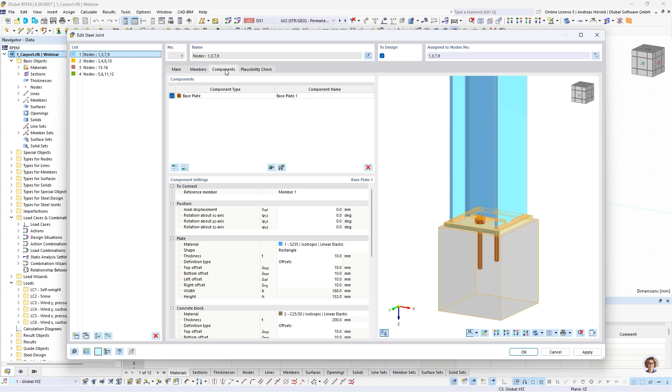I'll start with the carport model I presented in the last webinar. Let's turn to RFEM. This is the model from the latest steel joints webinar—a carport made of steel. We created different joints: a base plate for the columns, rigid connections for the frames in both directions, and joints for the inner and outer purlins.

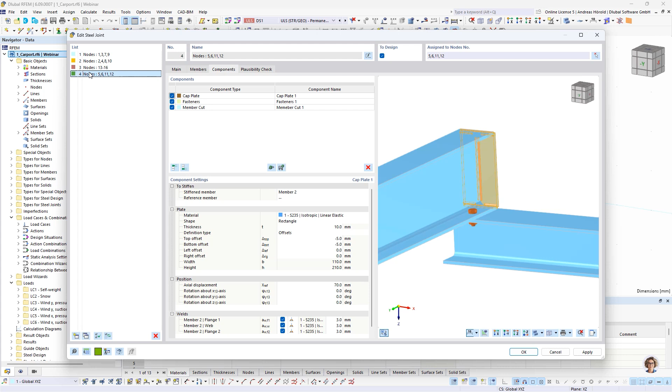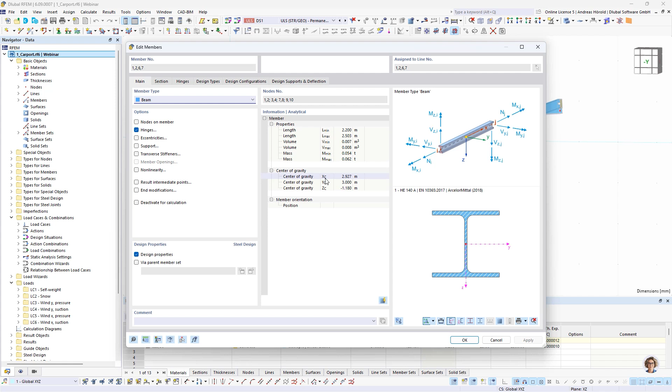To show the feature with circular bolts, I'll change the cross section of the columns. Members, edit. We change the section to a circular hollow section, this one.

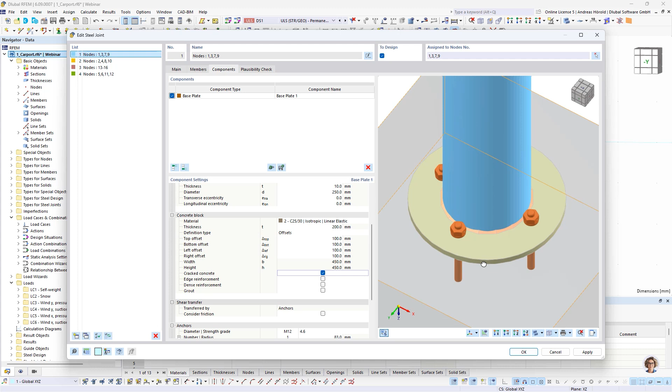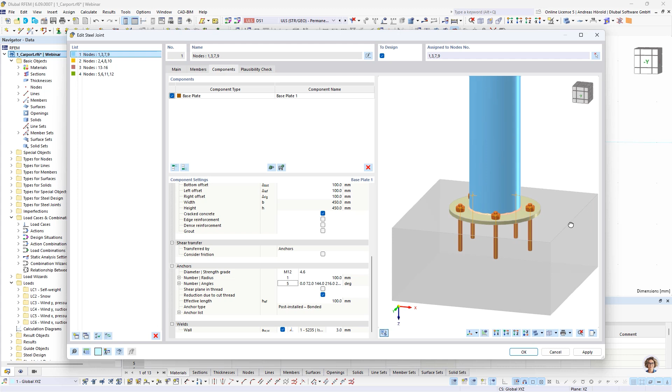Now let's change the base plate. First, we change the shape of the plate to circle and set the diameter to 250 millimeters. Then we make the concrete block larger. We use 5 bolts, and the radius should be 100. That's all for the first feature.

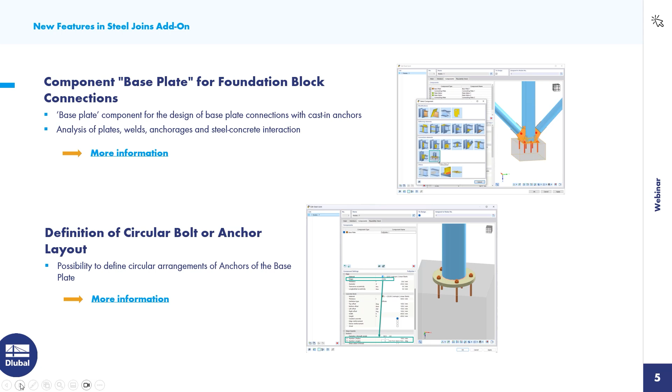Let's turn back to the PowerPoint. I defined the layout for the anchors, and the same workflow applies for bolts. Next new feature: component rib. You can define any number of longitudinal ribs on a member plate with the rib component, and this is also possible for circular hollow sections.

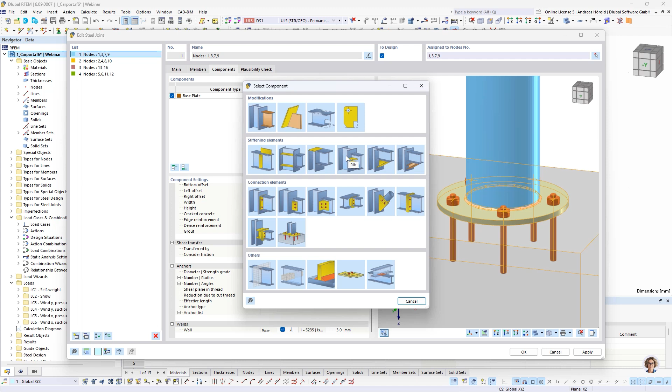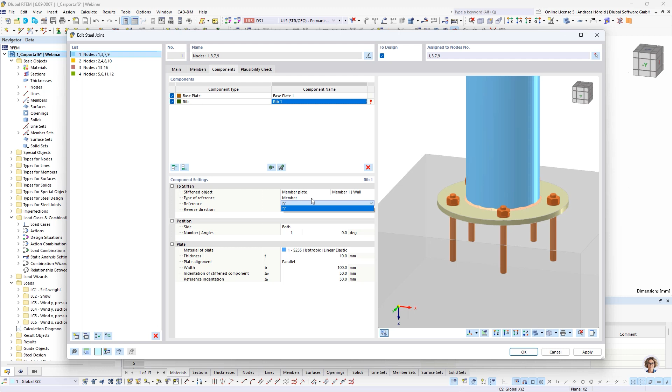Let's turn back to RFEM. We have a circular hollow section, and let's define ribs here. New component—in the middle, second line, you can find the rib component. Member plate is correct, and member 1 and wall is the stiffened object. The type of reference should be the base plate—base plate 1, plate. Okay, you can see the rib.

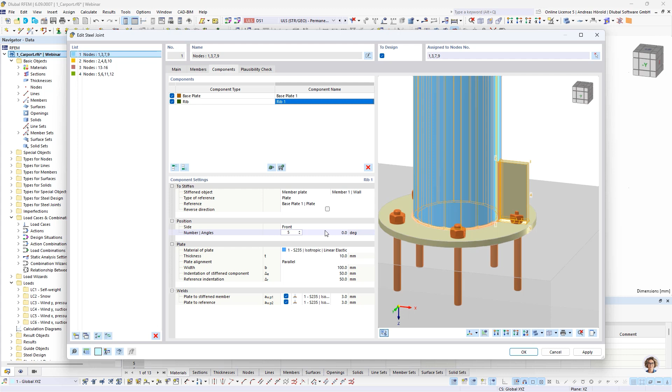Not on both sides, but on the front side. Number of angles is 5, the same number as for the anchors.

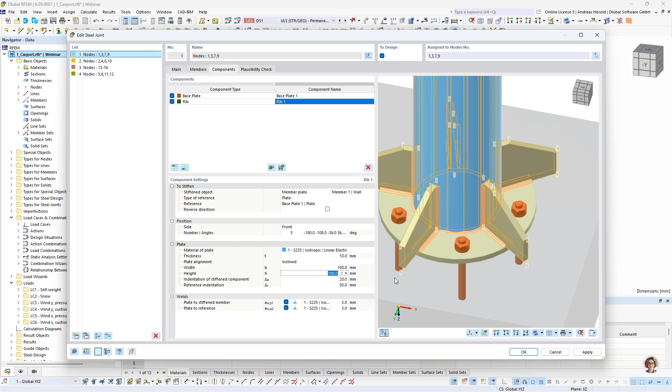Let's modify it a little bit. That's too small, not parallel—we use inclined instead. Then we modify the ribs a bit: 20 is okay, and 30. That looks quite good. Let's turn to another example for the component rib—you can also see a rib here.

This is the component, and here you can find the rib. Let's modify that. We create 2 ribs with another distance, -50, 100, on both sides. Yeah, a quite useful component, and it's quite new in our program.

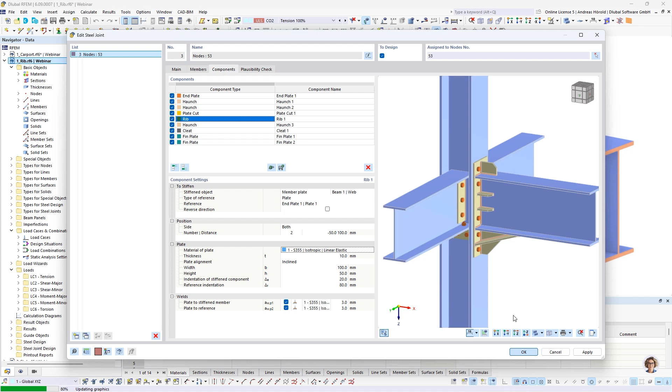So then let's turn back to the PowerPoint slide. Limit plastic strain for welds. You can modify that value for more security or something like that. The standard setting is...

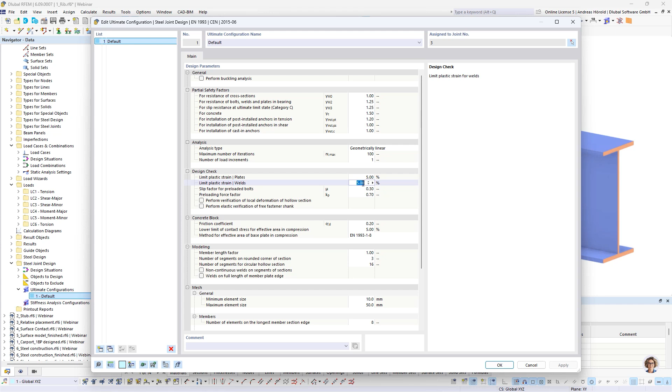5. Let's turn back to RFEM. I can show where you can change that. You need to select in the navigator data and steel joint design, the ultimate configurations. So you can then see here the limit plastic strain for plates and for welds. And as I said, 5% is the default value, but you can change that if you want.

So let's turn back to the slide. Next slide, and next new feature, the component stub.

It enables extension of a member via plate joint with another member. If you add such a component, it's not considered for the stiffness of the global model, but for the connection. So let's turn back to RFEM.

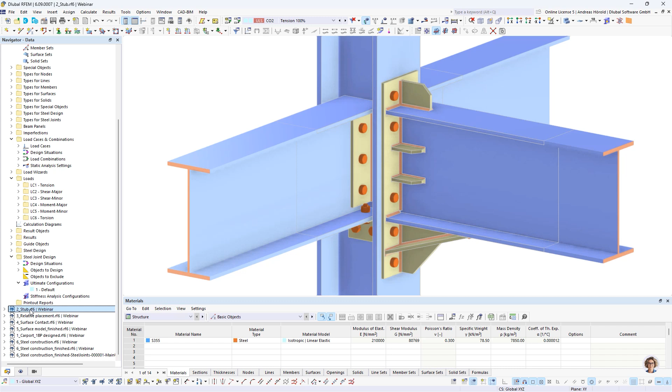The next prepared model. So you can see that node, and imagine you want to connect this horizontal member to the column with a rigid connection, but you have no space for the bolts here because of this joint.

So, and therefore, we can add a stub. Double click on the joint and add a new component. You insert component at the end. So, and you can find the stub here in the third line, and you can see the stub.

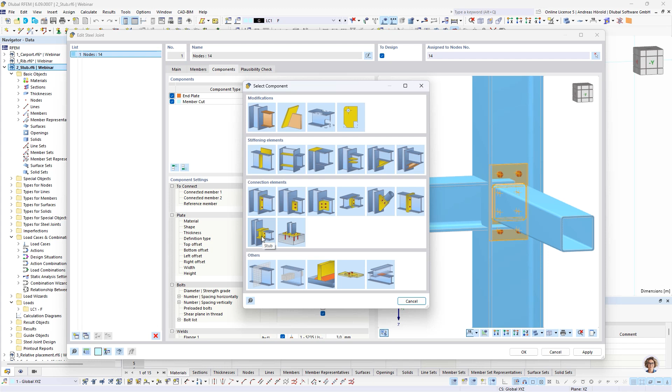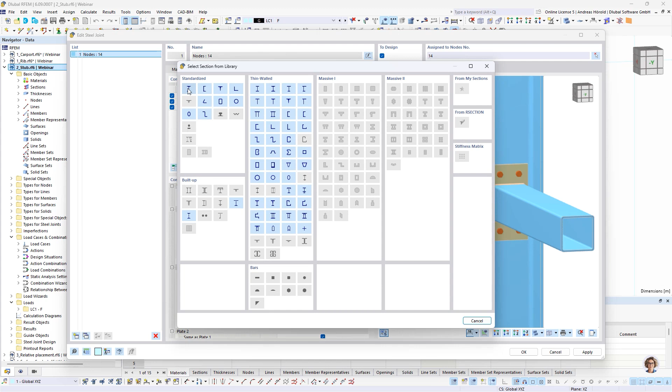Okay, so then we have to define the connected member, member 2. Then reference member is this one, the column. So then we have to define a section. We use the same section as for the horizontal beam, standardized, then HEA 200.

So now we leave the length 300 millimeters. Then we define a larger thickness. Now let's change the values to increase the plate a little bit.

Let's modify the bolts. And 16, 10.9. So, and then 75, 90.

Yeah, that's the component stub. And you can use it for this, for such connections, or also for other connections.

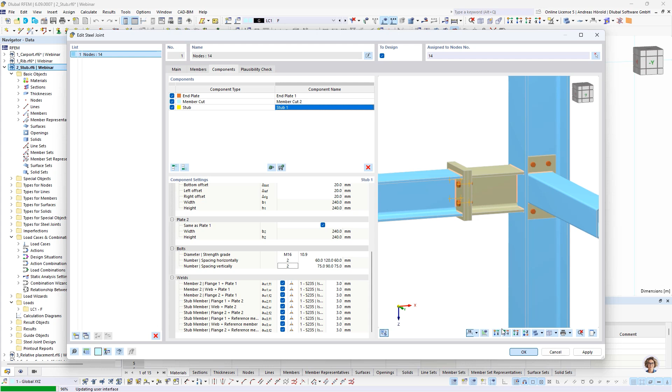So then let's turn back to the PowerPoint slides. Next new feature, the relative placement of objects. You can arrange objects with a relative reference to other objects.

I would like to show that also in RFEM 6. I've prepared another model, this one. Okay, let's double click on the joint components.

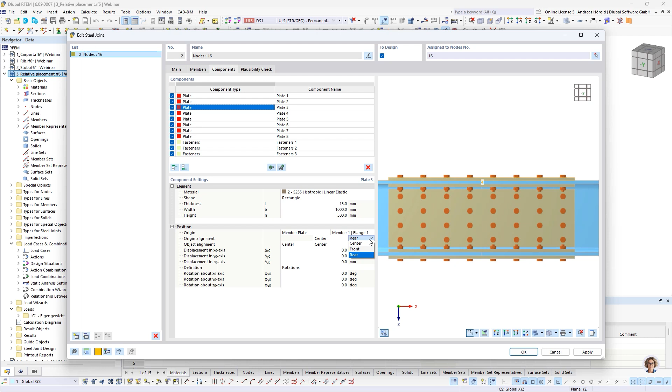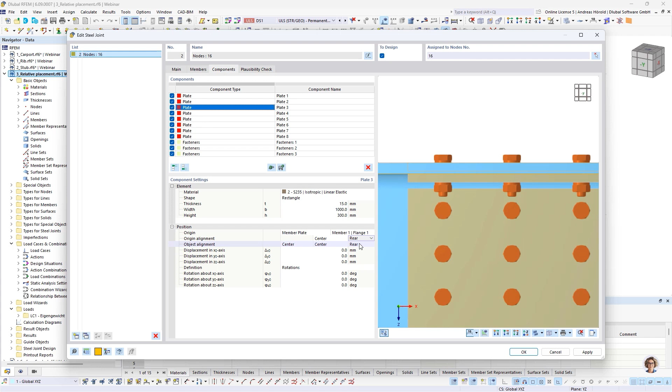And I would like to show that on the upper plate, on this plate. So, and you can see the alignment here. The origin alignment, it's the definition of the origin. And if you say, okay, that's not the rear, but the front, then there's another reference. And the object alignment, when I say not front, but rear, then the plate is below the flange. Okay, I hope you understood what I did. I move it back to the upper side.

Or let's show that on another example. I decrease the plate a little bit. Ignore the bolts. So, and if you want to define the plate not on the center for both, you can, for example, define the left side for both, and you can see now they are at the same edge here.

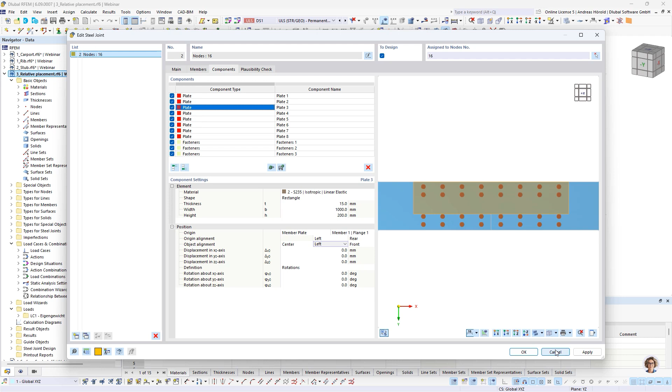Okay, that's all to that component. Turn back to the PowerPoint slide.

Next new feature, connection library is now in the Dlubal center. You can define your own user-defined connections there and so on. I will show that feature later when I search for a prepared connection in that library in the last example.

Then plate component with polygonal geometry shape. You can create such plates here with a polygonal shape. That's possible now.

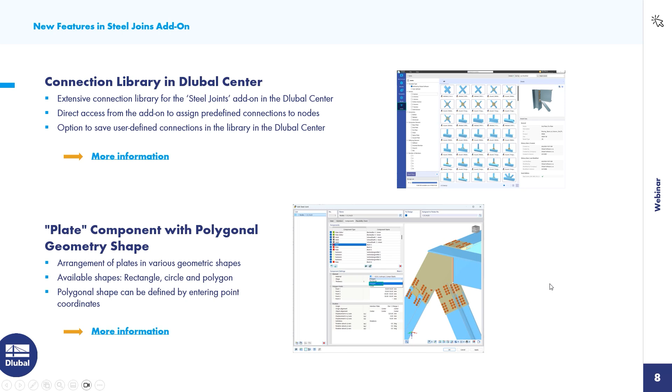So then the new component surface contact. You can also consider friction between two members or plates, for example. I would like to show that in RFEM 6 as well.

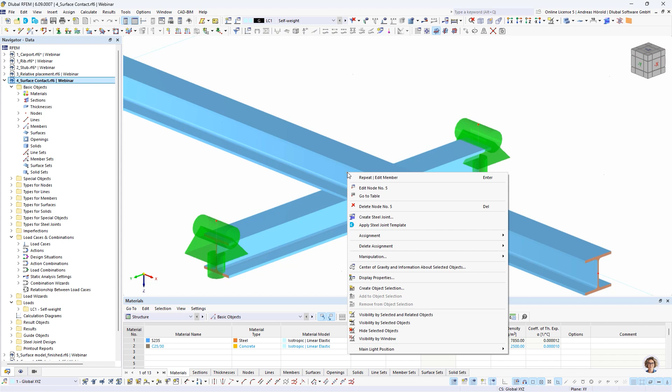So I prepared that example. You can see this member has an eccentricity, and the top of this member is equal to the bottom of this member. So, and let's create a steel joint.

So those are the four members. They are not ended but continuous.

Then components, new component. That's the component in the last line on the right side, contact.

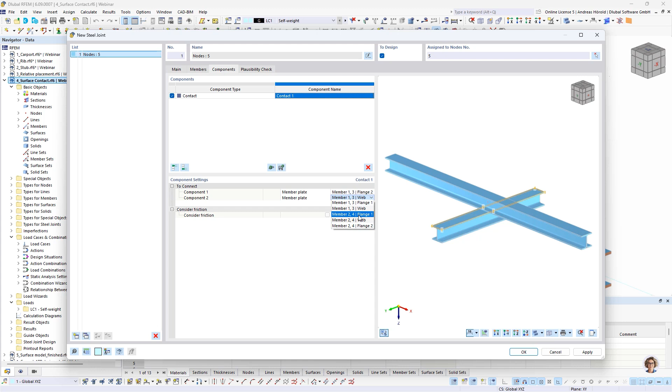So then let's select the components, member plate, member 1 and 3 and flange 2, the lower flange. And for this member 2 and 4, the upper flange. Okay, so, and you can also, as I said, consider a friction coefficient.

Okay, that should be all to this feature.

The next feature is the steel joint design on result beam member type and surface models. You can define result beams or surface models and consider that for your steel joint.

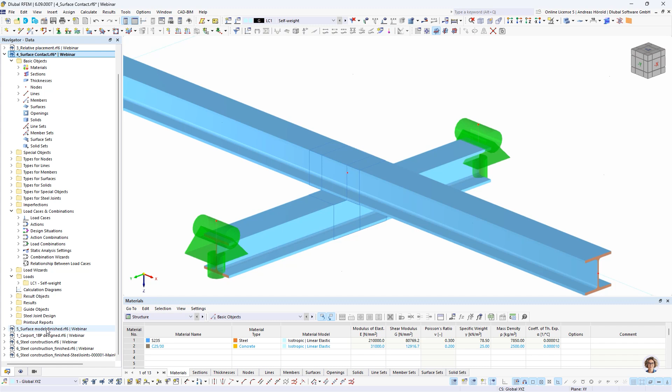For example, when you create openings, you can use a surface model. Let's take a look at it in the next example. In this example, there's a surface model with openings. How to create such things: that's a surface model, and for the member I created a surface model. I double click on it.

So member type is surface model. Then you have to select a section. And for example, you can then define member openings, reductions. A circular opening at that distance, two openings with that offset and that diameter. Okay, those are the openings. And that's the assigned line 22, this line.

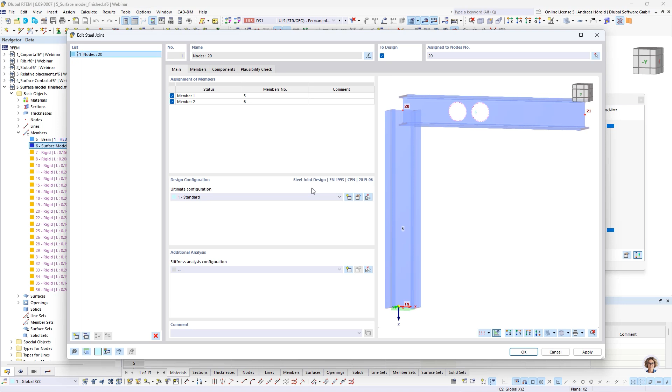So, and then you can create a joint for such a node with these components. Quite easy. Okay, that's all for that new feature.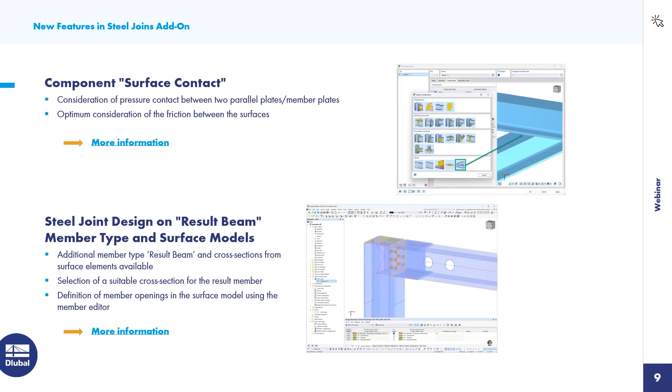The next feature is the transfer of foundation dimensions in the base plate design. At first you have to define concrete foundations in the add-on, and then you can adopt the foundation dimensions and materials in the base plate component.

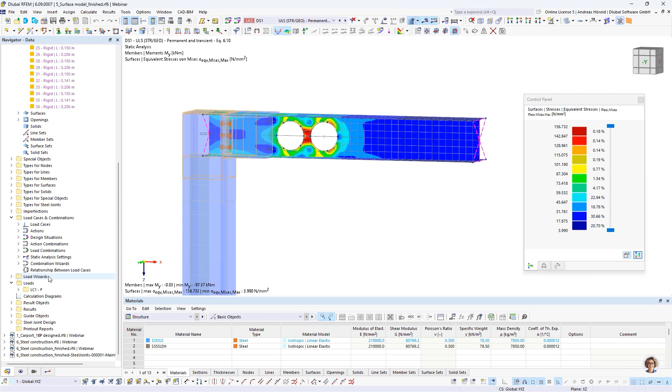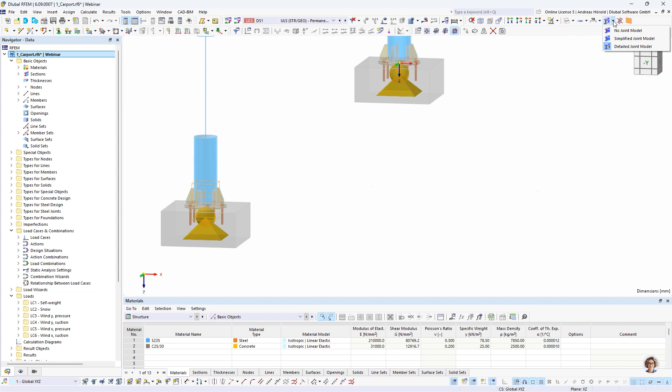I would like to show that also in RFEM 6. So that's the prepared model, the carport. We turn back in the carport. So, and we define now foundations. I have to go to the base data, then switch or check the concrete foundations add-on. Okay. So, and I define foundations now. Let me turn to the wireframe model and switch off the joints.

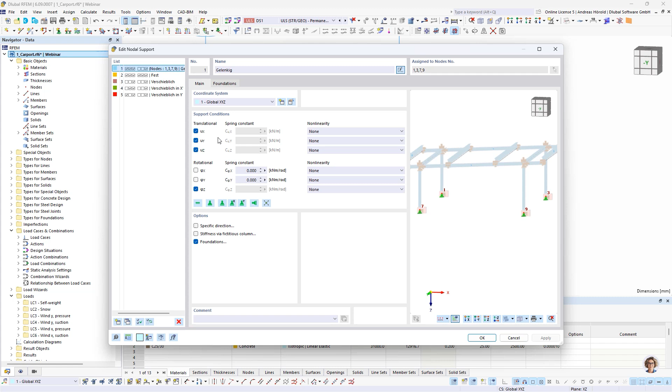So, and I have to edit the nodes. So, and I have to go to the support, then edit the support. So, and I check foundations. And I create a foundation, a single foundation, new. A foundation plate without reinforcement, a simple component or foundation.

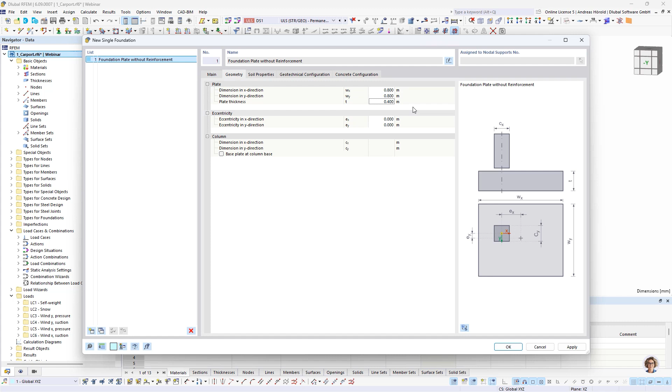Geometry: 0.8. I created it a little bit larger so we can see the difference to the block that we created at the moment. So that's all. Soil properties: I have to create a soil layer, sand for example. Okay. So, okay, that's all.

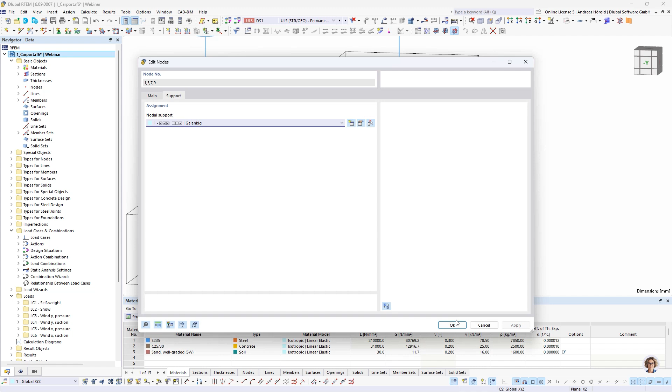Now, we have foundations below the columns. So, and now we switch to the detailed model. So, and I double click on that steel joint. So, and then I turn to the components, base plate. So, and now you can check this geometry from concrete foundations, and you will see the difference when I set the check.

Okay, now it's a little bit larger. Yeah, and as I said, it adopts also the material, not only the dimensions. Okay, so...

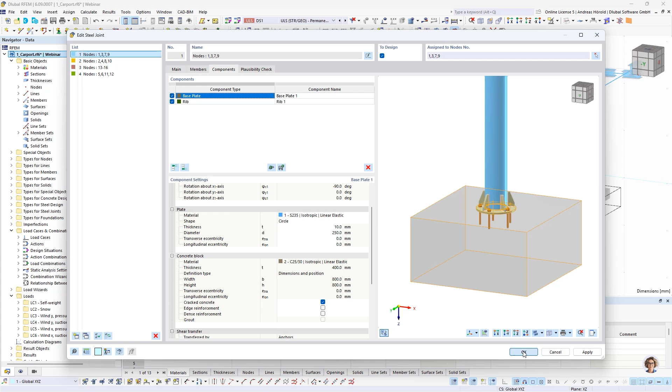Then we turn back to the PowerPoint slide and to the next new feature. The contact stresses can now be displayed graphically. I would like to show that also in RFEM.

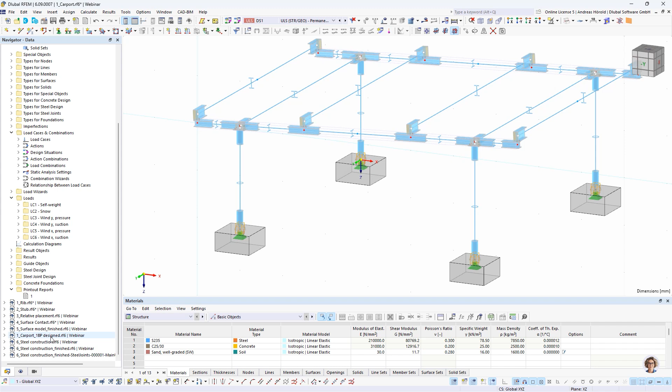So I prepared that model. It's the same carport, and one base plate is designed. So then I turn to the steel joint design table, and I double click on that line. So, those are the design check details. Yeah, and most of you know that, but the design checks are printable.

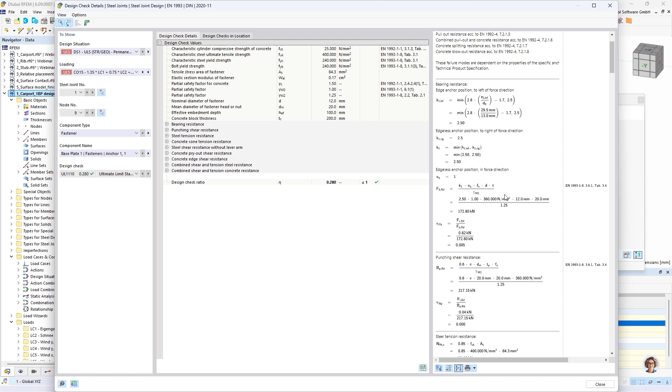For example, this design check, that's not a black box. You can print it to the printout report or directly to the printer. That's the equation from the standard. Yeah, as I said, no black box. You can calculate it by hand if you want and check that.

So, and when I turn left above to the results in steel joints, and then to the result in steel joints, I can set this check contact stress. And you can see the different contact stresses here. Okay, that's all for that feature.

Let's turn back to the PowerPoint slides.

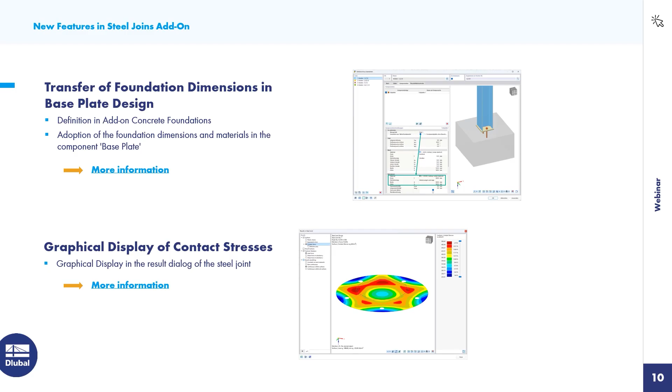And we turn to the last feature for today, and I will show that on an example. The joint structure interaction: that's the automatic consideration of the stiffness of the steel joint. It generates hinges in the global model, and you can consider the hinges in the subsequent calculations. I will show that also in RFEM 6.

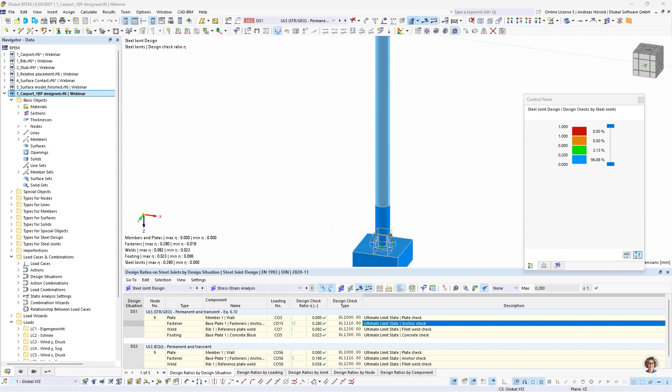So that's the prepared example: a steel construction, one floor. I created load transfer surfaces to apply a wind load for that area, on the top of the floor and the area below the floor. So then let's show the different loads: self-weight, then the imposed load.

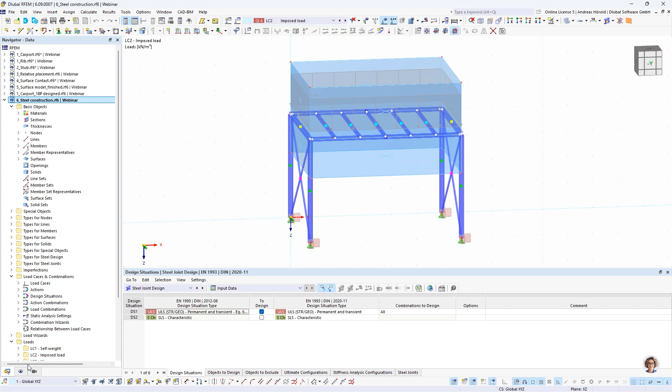Let's switch off the surfaces for a better overview. So surfaces off. That's the imposed load, and the different wind loads.

Then the ultimate limit state design, serviceability limit state design. And I did a steel joint design.

You can see the results, for example design ratios by section. Those are the columns, those are the horizontal beams. Okay, all is good, but we have a...

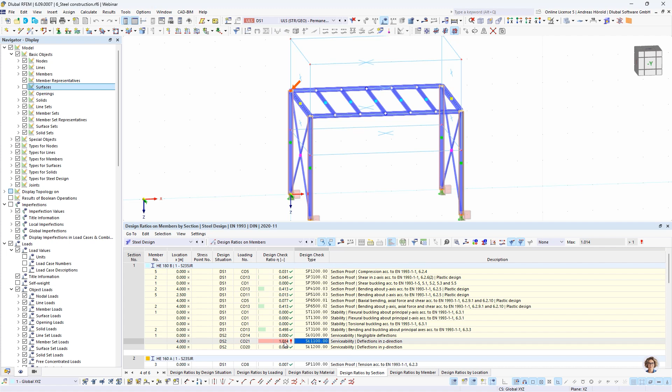design ratio for the serviceability limit state design of the columns in the horizontal direction. It's slightly overloaded, but I think it's okay. Yeah, but the question is, what happens when we create a steel joint? And that's what we check now.

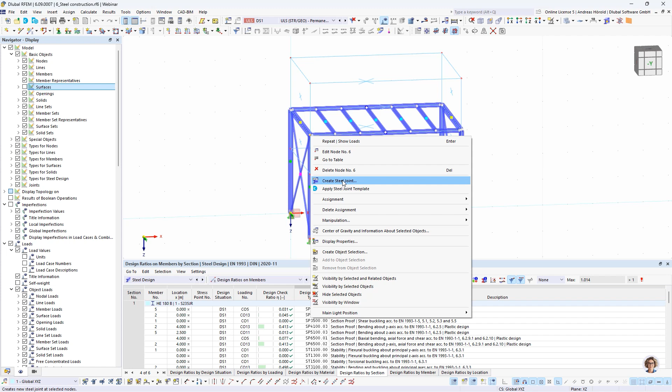So we create a steel joint, for example for this node. Create steel joint. I rename it from member to column, and this member I call only beam. So we don't use that member and that member.

So that's the ultimate configuration. It's okay. And that's now the new feature, stiffness analysis and stiffness analysis configuration, where there are different possibilities: the initial stiffness, no interaction, and this is the new feature, joint structure interaction.

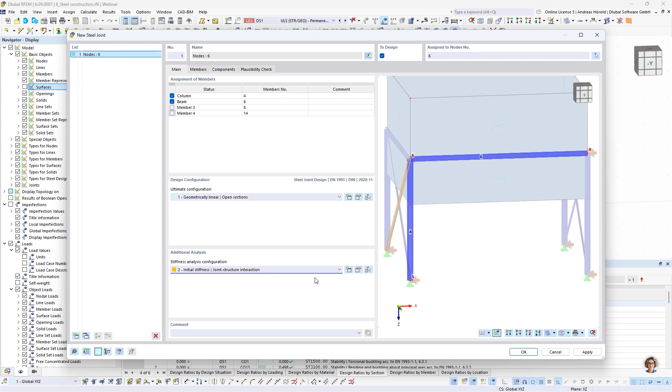And if I select that, let's take a look at it. It considers the initial stiffness, and the program or the add-on generates hinges in the global model. We'll take a look at it later.

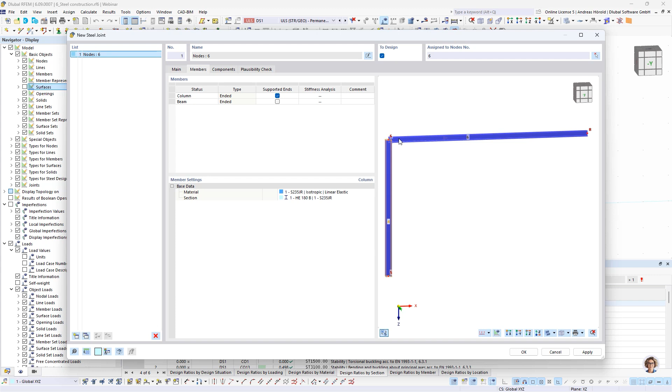Okay, then members. That's okay, and we have to select for the stiffness analysis... MY, of course, but we can also check the other stiffness analysis. So the program will do a stiffness analysis and create member hinges on that node later.

I will show that later on the finished model. So then components.

We create a new component from the library, and now it opens the Dlubal Center. You can see a large database, and you can choose between different connections. You can see I also have user-defined connections here.

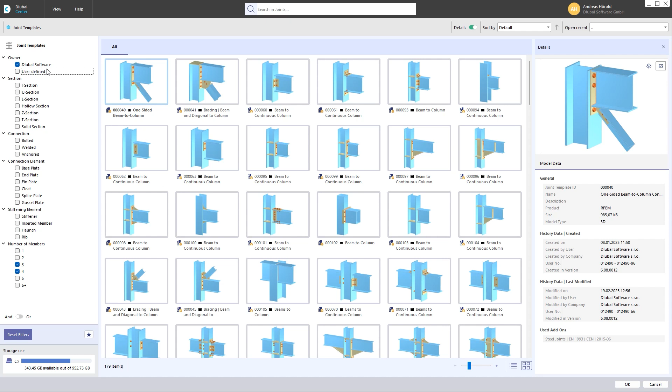Only these ones, then I can deselect it. Those are the Dlubal software templates, for example for I sections in our case. 2 is the number of members, and we select number 40, this one.

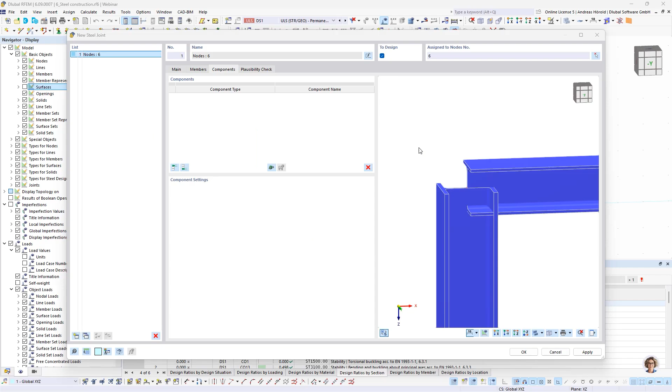Okay, so it takes some seconds. It has to be loaded from the library into our model. Okay, yeah, that looks already quite good.

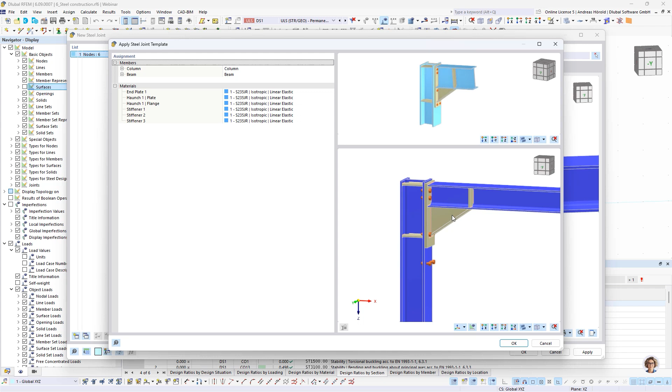It should be a stiff connection, with the haunch. But we will create a smaller haunch, so we have to modify it.

So at first we change that stiffener, or we create and add a plate on top of the column, a cap plate. So let's do it. At first I delete the stiffener.

Okay, so let's load a cap plate, on the top of the column. Reference member is the beam.

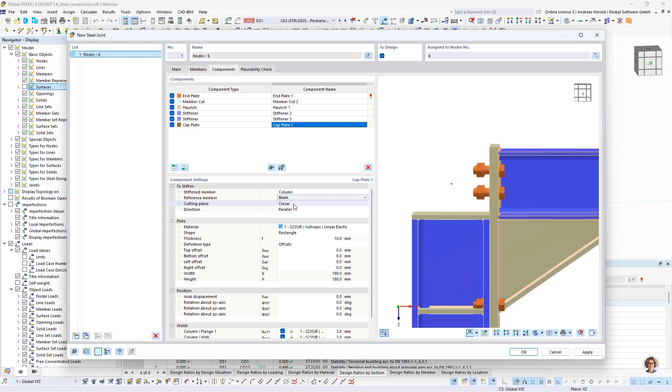So then rectangle, not the closer but the farther cutting plane. Okay, that looks quite good. So parallel, thickness 10 millimeters, is okay.

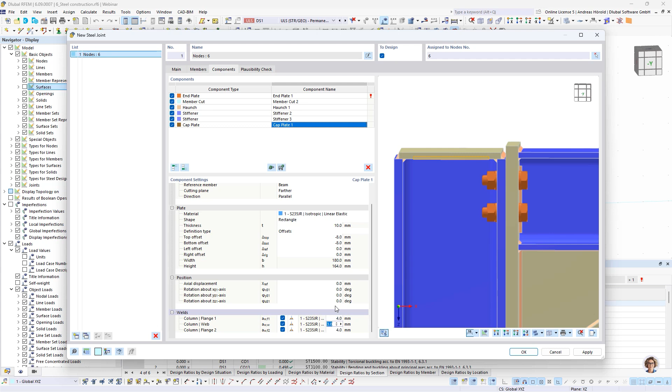But we have to define an offset so that we can define welds here, also on this side, -8. So that's okay. We only modify the welds: for the flange we use 4 millimeters, and for the web, 3 millimeters. Okay, that's all.

So then let's turn to the end plate. We need to modify it. The reference member is the connecting member, beam column. That's okay.

Thickness should be 15 millimeters. Then we don't use offset, but dimensions and position. 170 is okay, 260 - we decrease the plate a little bit. So -8. Okay.

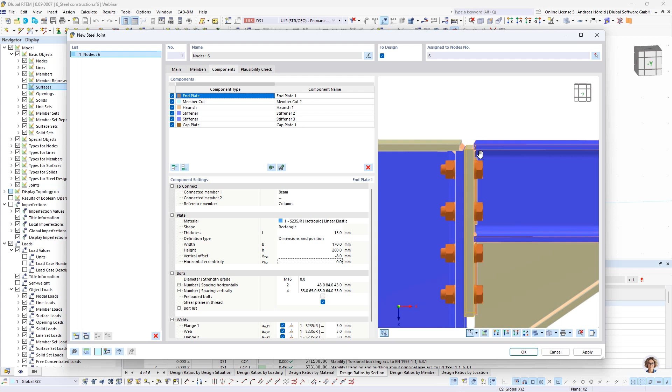So then M16, 10.9. Then only 3 spacings vertically. So 40, 90. Let's move it a little bit. So for this then 35, 65, 90. Okay, that looks good.

We use preloaded bolts, shear plane not in thread. So the flange weld 4 and web weld 3. Okay, member cut - we don't need it anymore because of the cap plate, we can delete that. Then turn to the haunch.

So that's okay, we only need to modify the dimensions: 200 millimeters, then 90. Okay, so that's all okay.

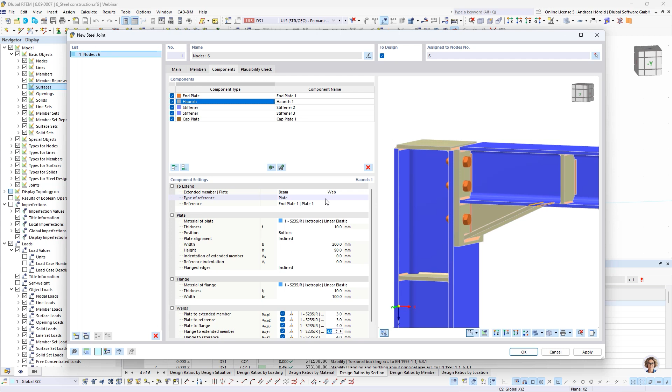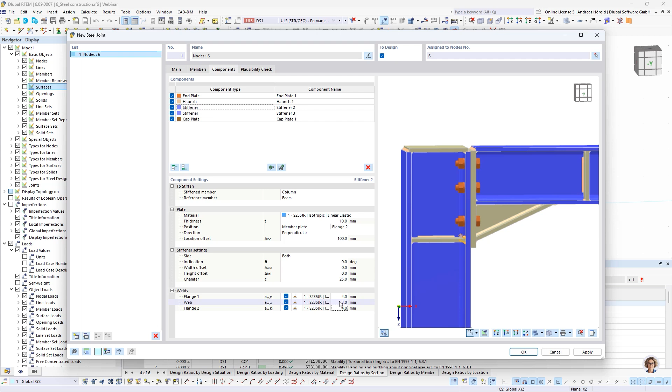Yes, okay, so we have to modify the stiffeners. The location offset is 100. Okay, so 4 millimeters for the flange welds. That's okay, and the other stiffener...

320. Yeah, now it's in the right position. We only need to modify the flange welds. Okay, that's all for this steel joint.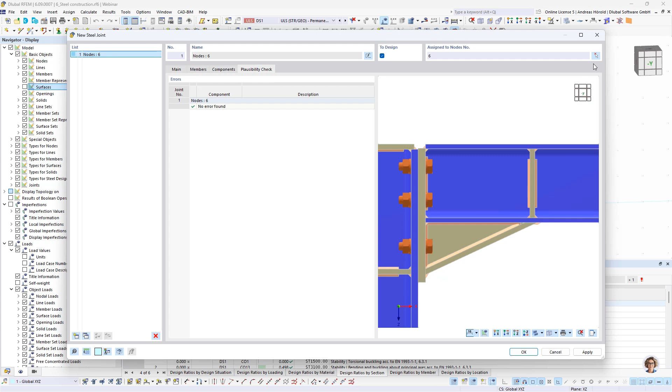Plausibility check is okay. We can add the other nodes.

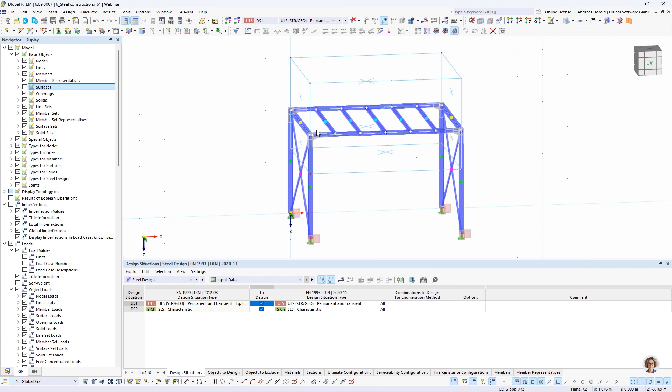So all steel joints are created, and now we have to calculate. I did the cloud calculation - calculate in the cloud.

There are different servers. You can get an email when the calculation starts and when it's complete. You can also see the file in the extranet. I did that already, and I turned to the calculated model.

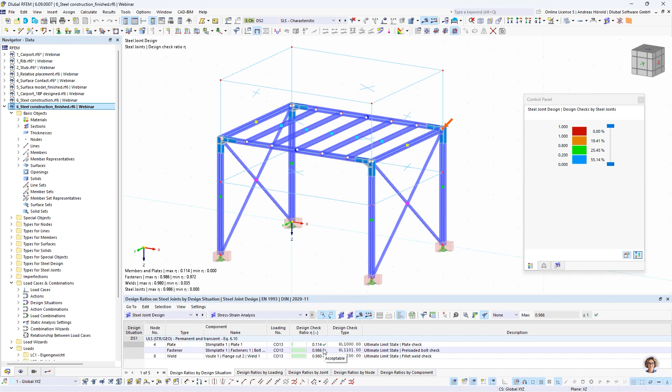So let's turn to the steel joint design. All is calculated and all design checks are fulfilled. So what is new? Those are the hinges. Let's turn to the navigator data, types for members, member hinges, and you can see the generated hinges.

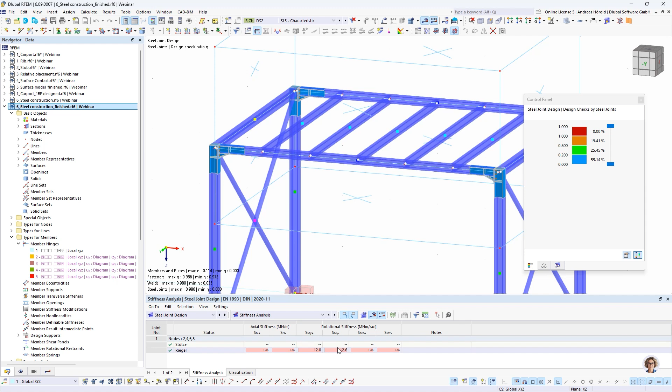We can also take a look at the stiffness analysis. Here you can see the values for the rotational stiffness for the moment. When I click on that hinge, for example, you can see the diagram.

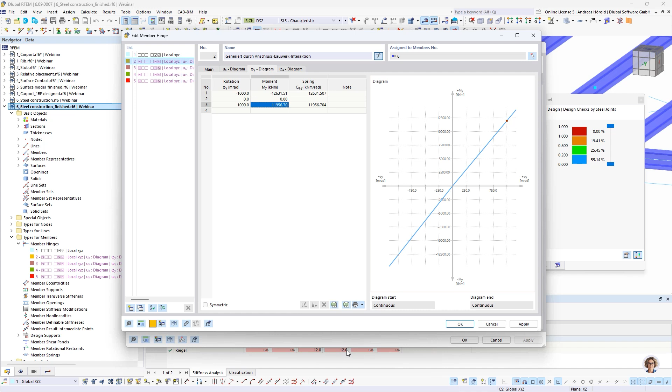I hope you can see the values. Those are the values for the M-phi diagram. The moment is in kilonewton meter, and where meganewton meter, 12 is equal to 12,000, and 12,600 is equal to 12.6 meganewton meter. So those are the hinges, and they are considered in the global model.

So let's turn back to the steel joint design. I double click on the design check, and I would like to show you, it's often asked, is it a black box what the program calculates? It isn't a black box. I will show that on the submodel.

First, I will show where you can find that submodel. Now it loads all designs. It takes a little bit. As I already mentioned, you can print the design checks with the equations from the standard in the printout report. And when we turn to the results in steel joints, left above,

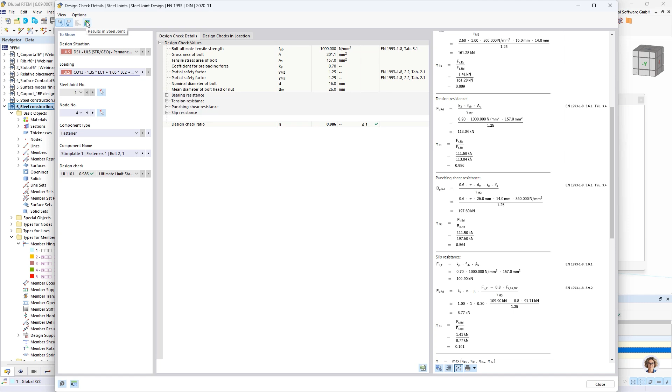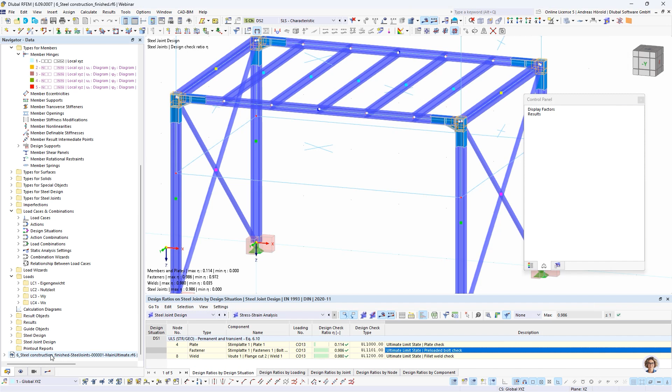you can save, left at the bottom, the steel joint model, and we call it the submodel. So let's turn to that submodel. I already saved that. That's the submodel, and you can verify it. As I mentioned, it's not a black box.

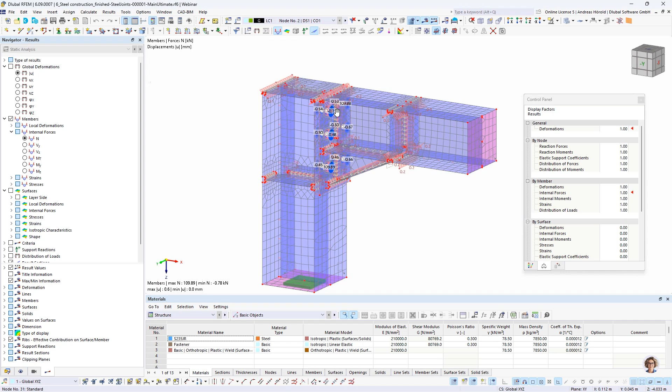You can see the deflections or deformations here, and when you want to see the members' internal forces, the normal forces for the bolts, those are bolts. You can see it's a quite complicated surface and member model. For example, those are the welds, that's a surface with a thickness of 4 millimeters. I hope you can see that. And those are rigid links. Also here, quite complicated, but that's the submodel the program calculates in the background.

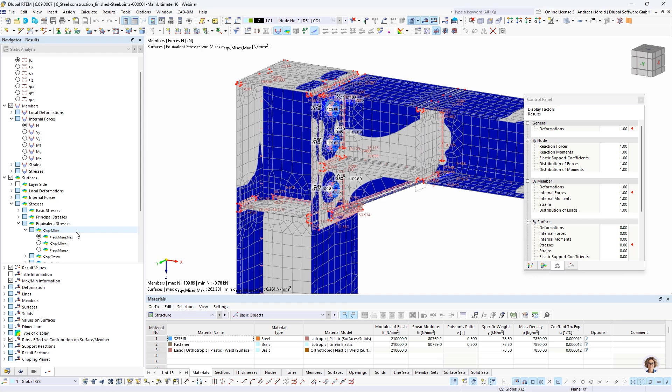So let's take a last look at the surface stresses, equivalent stresses, for example. The highest stresses are around the bolt holes. Okay, that should be all for this new feature, or for all new features.